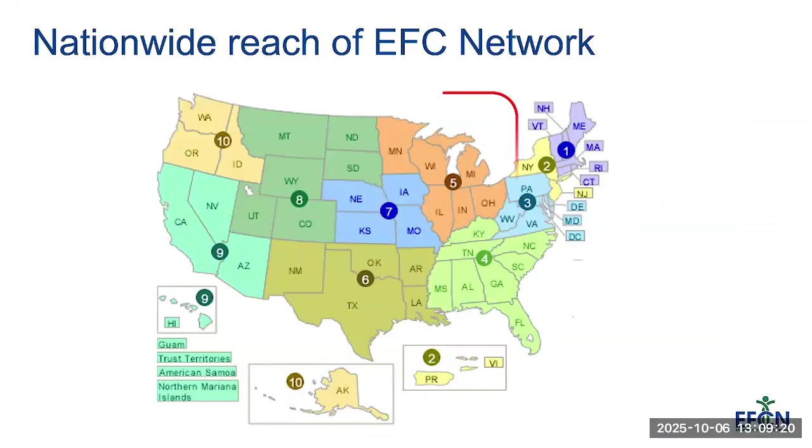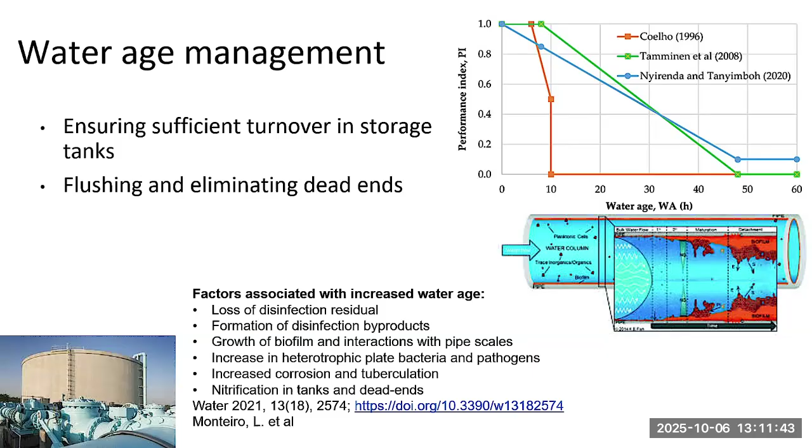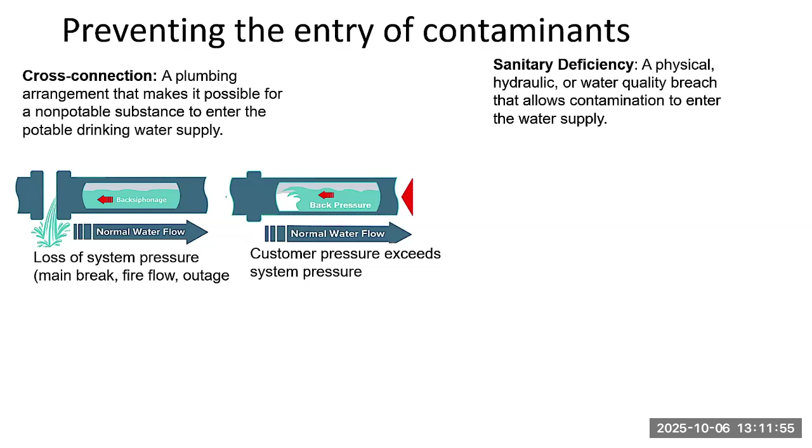Another way that contamination could enter is through sanitary deficiencies. And here we have an image of actually a well-protected air vent valve, and we have a screened inlet, so bugs and pests can't enter. And it's well vented, and it's 8 feet above the ground. So there's different things that could happen here, though. Still, let's say we had floodwaters that were 9 feet above the ground, and then that would be an entry point where floodwaters, contaminants could get into the system.

And a final aspect that Daryl's going to talk about tomorrow is sanitary deficiencies. And here's an example of a well casing that's not properly sealed on the top of the casing. So contaminants from flood or just dust or some kind of a spill could enter directly into the casing and down into the groundwater.

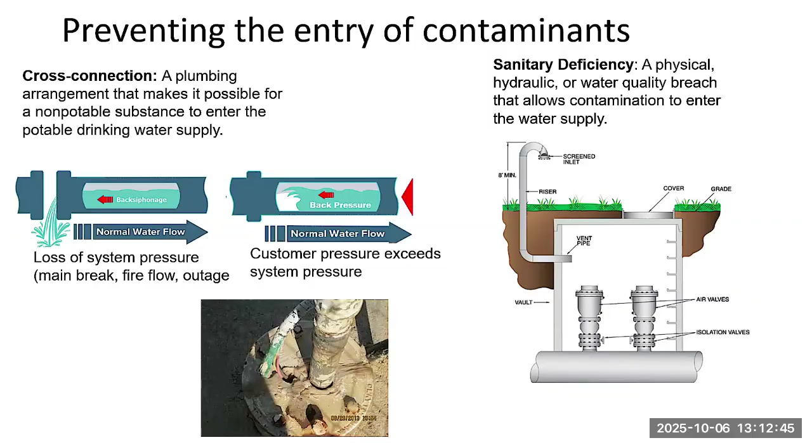There are some different things that can occur when we repair water main leaks and breaks. And in general, we want to have some procedures that help us to protect water quality. And the three basic things that we do when we go to repair a main break or a leak, or just any kind of repair to the water main, is we isolate that area by valving. We flush out the contaminants, and we disinfect that section of main after the repair.

And there's some different factors here. Table 1 at the top left of your screen is the types of things that could happen associated with the repair of water mains. One is we can have contamination by pathogens, bacteria and viruses and protozoa, and some different types of chemical issues. We could have some kind of a chemical that enters. We could have a loss of disinfection residual. We can have different types of problems with pH and turbidity.

And they did a study here that's reflected in table 2 that looked at break repair sites, and they sampled the water in the trenches, and they sampled the soil around the main break, and they found several instances where there was either total coliform bacteria or fecal coliform or different types of bacteria that are known to cause waterborne disease. And in several instances, they found bacteria that would cause illness in many of the samples.

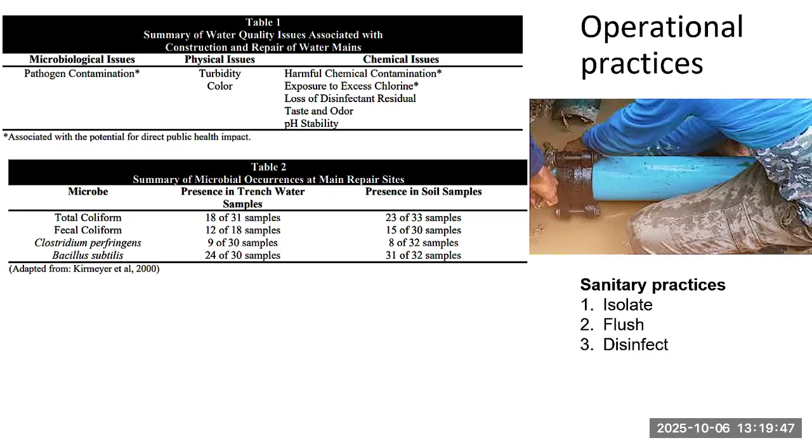And what we just did was kind of an overview, an introduction to the topic of distribution system water quality. And now we're going to start getting into our next topic, which is system flushing. There's lots of benefits to flushing. You can see some operators here that are making some repairs at a hydrant or preparing a hydrant to potentially add a swab or a pig in there. And you see an operator on the bottom of your screen that's actually flushing a hydrant.

But there's lots of benefits. One is it reduces the water age. It can reduce the biofilms and scales inside of pipes, and it removes the sediment that collects in water mains. And it can actually help to reduce disinfection byproduct formation, and it can bring in fresh chlorine residual to dead ends.

Normally, we flush at least once a year. I've heard a range. I've heard of some systems flushing twice a year, and I've heard of some systems flushing every 2 years. But in general, at least annually. And when I talk about an annual flushing, I'm talking about high velocity flushing of the whole system. But you might want to gently flush dead ends more often than that to prevent disinfection byproduct growth.

And also, when you're out there flushing, it gives you a chance to put your hands on the valves and the hydrants just to make sure they're working. And you could note if something needs some kind of repair, something that's malfunctioning. Even something as simple as painting the outside of the hydrant to prevent corrosion, or a valve that doesn't work, you would get a chance to see that. So there's a lot of benefits.

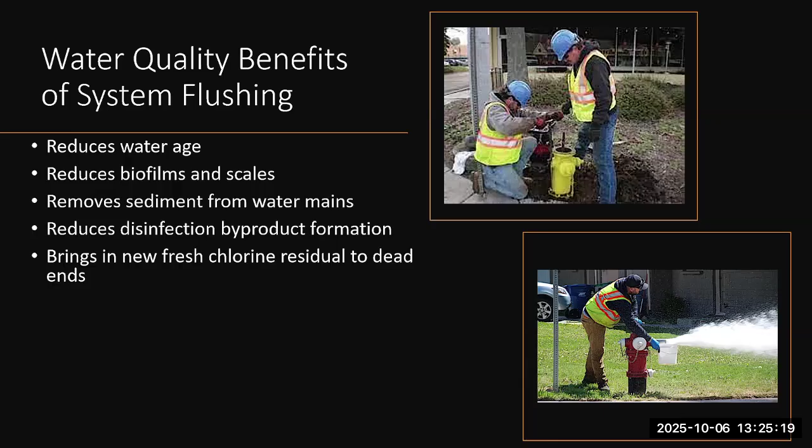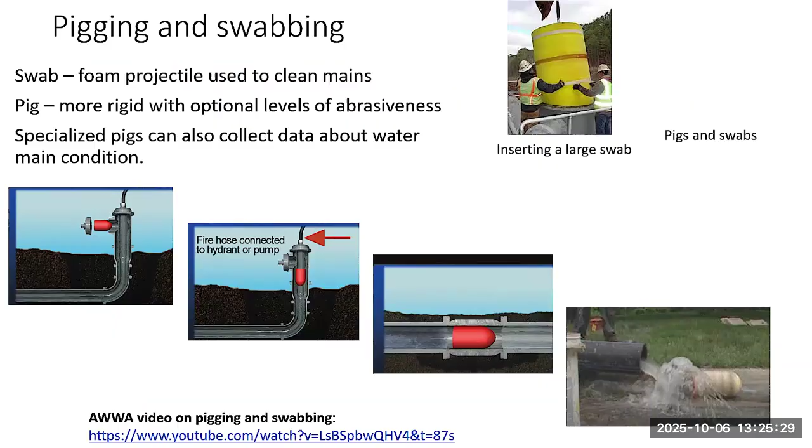And then normally they'll have the outlet hydrant go through a flow analysis unit so they can know when to stop, when the main has been cleaned, and they can see that the turbidity goes up quite a bit, and then it will drop off as the main is cleaned, and they can discharge that dirty water to the sewer.

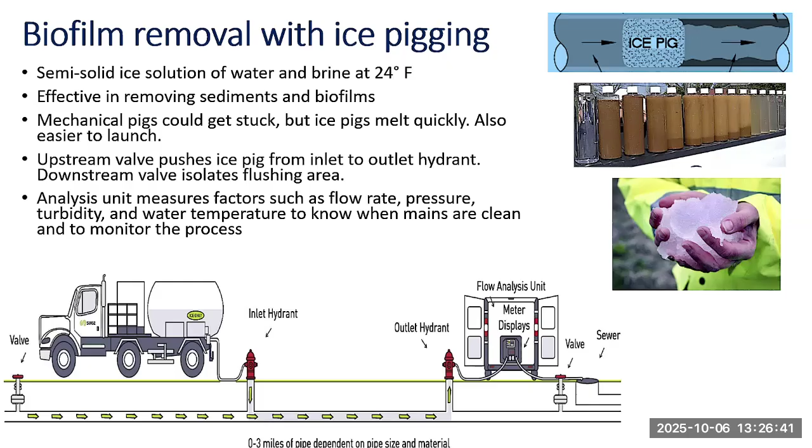In the analysis unit, they're also monitoring things like the pressure and water temperature, and looking at the turbidity of the water that's flowing through. Eventually, it will become clean. The turbidity will drop down to normal.

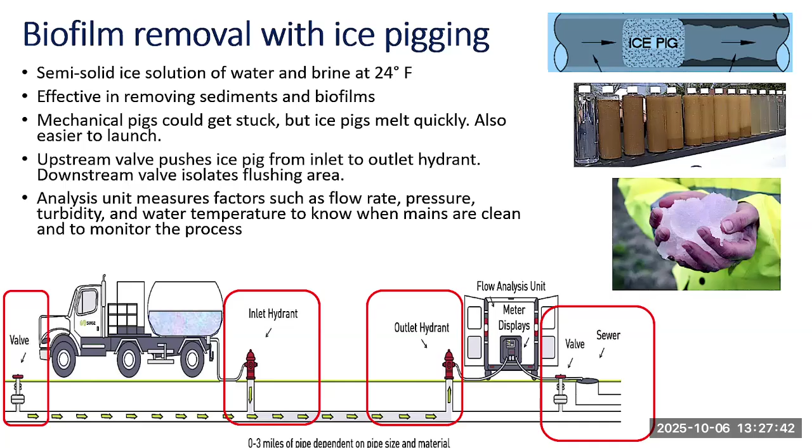So what you can end up doing is moving dirt and sediment around, but not out. And you can have insufficient velocity. We're trying to get the velocity up between 2.5 and 5 feet per second. But if it's going different directions and coming from multiple directions, we really can't have any certainty that we can attain the right velocity.

So what we use is unidirectional flushing, and what that means is we're closing some of the valves so that the water is forced to go down a certain path. And we continue to do that with each line so that we can attain the desired velocity. Let's say we're trying to attain 5 feet per second, and we use valving to do that.

And like I mentioned before, going out and flushing can be a form of preventative maintenance as well, because here we are, we're operating valves, we're operating hydrants, and you could even take some hydrant flow measurements while you're at it. So this can be a really beneficial practice to collect the data while you're cleaning the mains. And so when we do unidirectional flushing, it's kind of like sweeping the system. So we're using a systematic method.

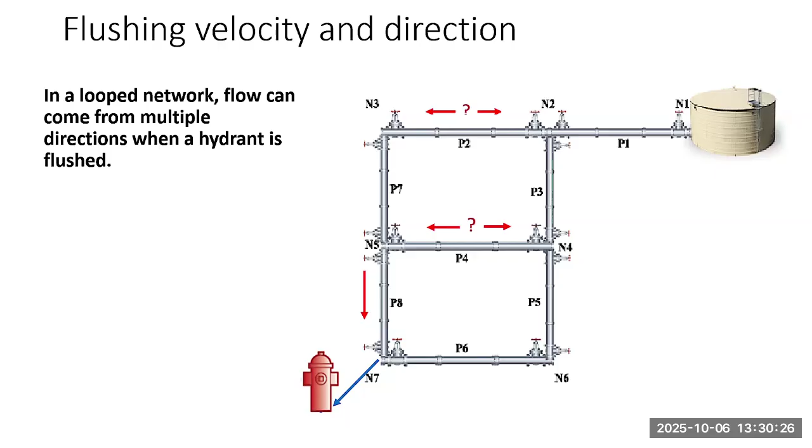When they extended flushing as high as 15 pipe volumes, they really didn't get much extra yield out of it. It did continue to increase removal, but it was kind of diminishing returns. So you're using extra water and not getting a lot back from it.

We've mentioned this a couple times, but there's some studies where you can see that main breaks and repairs are correlated with increasing waterborne illness. And some of these studies are from Europe, but there was one in Norway where they found that houses that were downstream of a main break or repair, could even be a planned repair, were 1.58 times more likely to contract some kind of gastrointestinal illness. That was pretty recent, 2007.

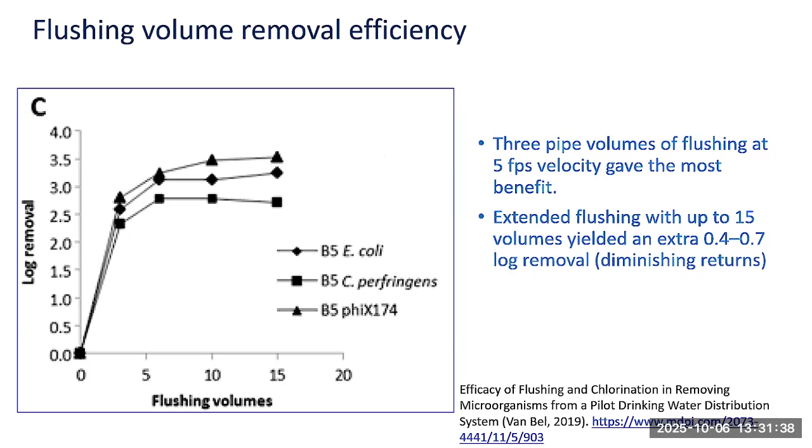And in Sweden, they found that people were 1.9 times more likely to report an acute gastrointestinal illness after a pipe break or repair in the distribution system. And that was a pretty recent study, 2017. There's some different things we have to think about. We talked about the contaminated water in the trench or the groundwater or the soil itself. Also, if you have a main break, it can draw in contaminants through cross connections.

But also another thing is that if you have sewage pipelines that are close to the same elevation or close to the area where there's a main break, that could also be a source of contamination that could enter the pipe when it's open for repair. And as we mentioned before a couple times, isolating, using sanitary repair procedures, including disinfecting tools and parts that we're going to add, and then flushing and disinfection following the repair. Those are all good ideas.

And so we have a second poll here. What is a recommended flushing protocol?

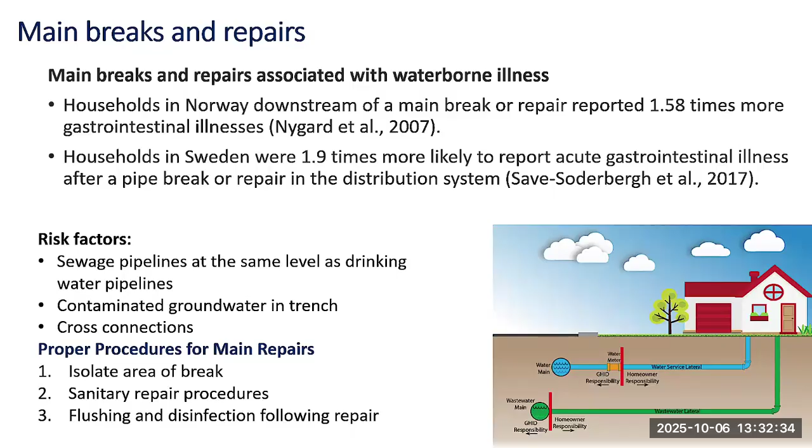You guys are really fast on your polls. I appreciate that.

Okay, so we have 86% have participated in the poll so far. Excellent. And I see that the majority of you have chosen unidirectional flushing at 5 feet per second for 3 pipe volumes, and that is indeed the recommended target for flushing a hydrant. Thank you for participating in that.

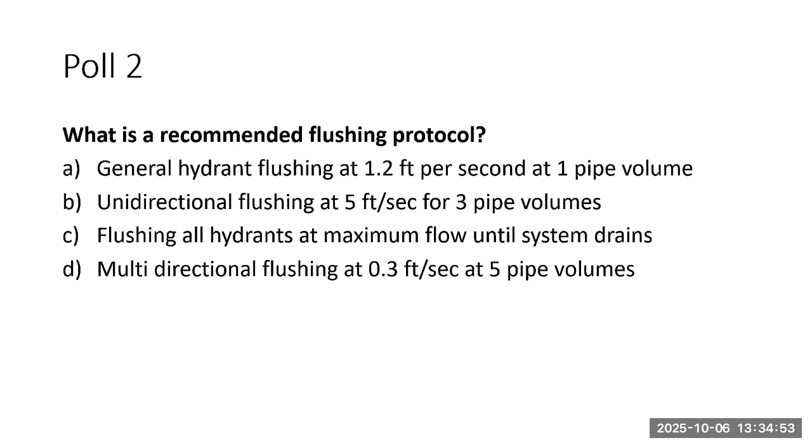And now we're going to talk about corrosion control a little bit. We talked about flushing. Let's talk about corrosion control. And first of all, look at the problems, what corrosion is, and some ways that we can prevent it. Corrosion, you can see a pretty poor, badly corroded pipe here. Looks like there's some real problems there. So one of the things is tuberculation, and that's when you have iron tubercles that grow in the pipe where iron is being deposited, and there's an interaction there with bacteria.

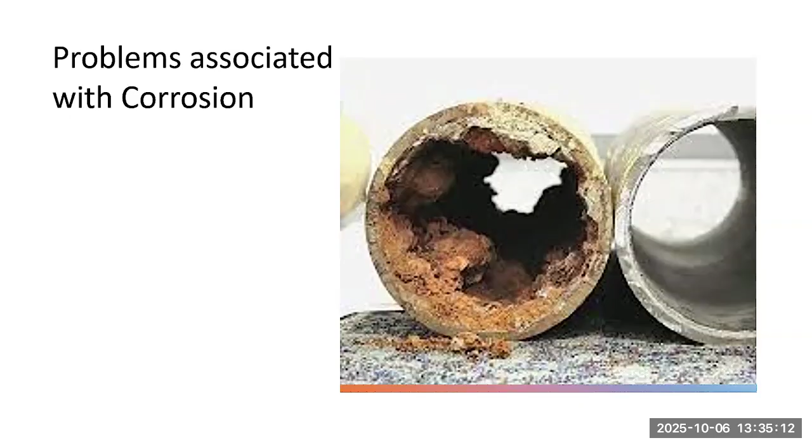Also, corrosion can be involved with the release of lead and copper. We have the lead and copper rule that looks at lead and copper in customer plumbing, and that is a result of corrosion. And corrosion can also lead to main breaks and leaks. So you have not only pathways for contamination to enter, but you're losing water. You're pumping and treating water, and then you lose it through cracks. And also, it can increase microbiological problems because you can see, looking at this pipe, there's lots of places for bacteria to be harbored in those tubercles in that pipe that we're looking at.

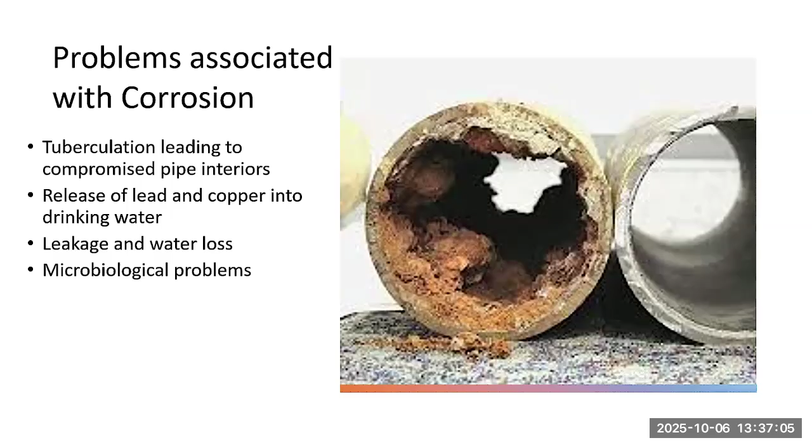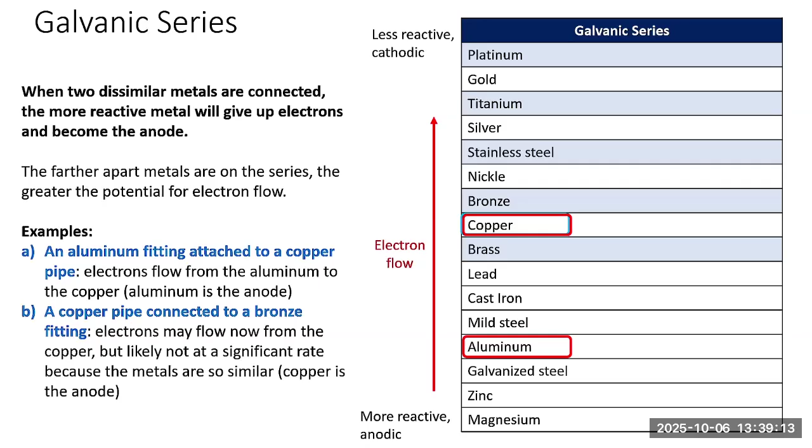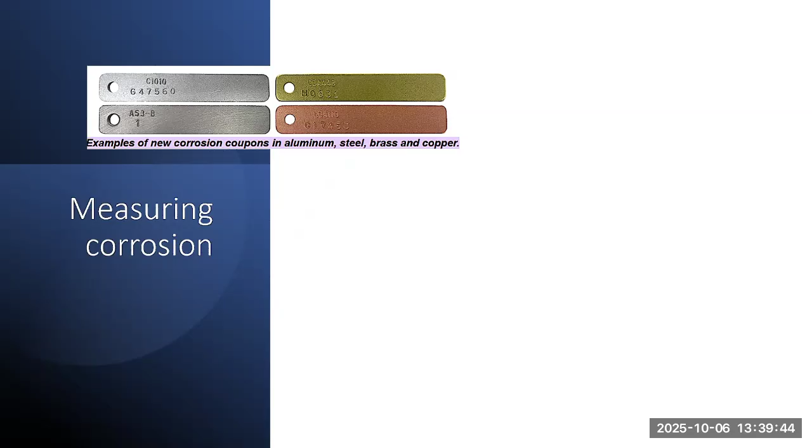To measure corrosion, we can use coupons. And here's different kinds of coupons here. We have aluminum, steel, brass, and copper. And the idea is that the coupon is the same material as the plumbing material or main material that we're trying to protect. And so we can actually have a coupon rack that contains the different types of coupons, and we can allow our drinking water flow to pass through those coupons and let the water flow for 90 to 100 days, then take them back out and weigh them and see if they've lost any weight. And so the coupon has to match the material that you're trying to protect. And so any difference in weight will give us a reading on how severe or how much corrosion has been occurring.

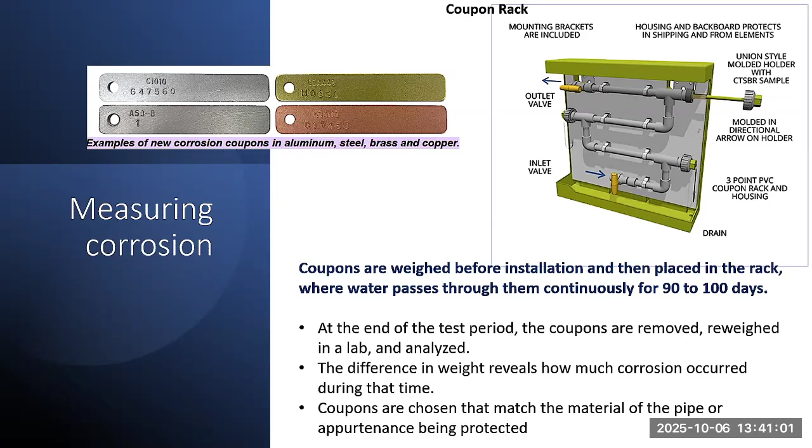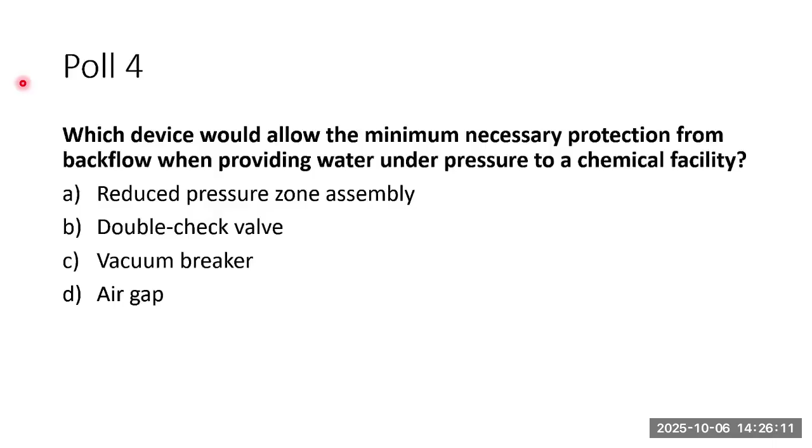So looking at the poll, which device would allow the minimum necessary protection from backflow when providing water under pressure to a chemical facility? 41% said A, reduced pressure zone assembly. 25% double check valve, 16% vacuum breaker, and 17% air gap. So let's see what we come up with.

The answer is A, reduced pressure zone assembly, an RPZ. And that's most likely based off the concern level of a chemical facility. So we would want to protect that from the rest of our system.

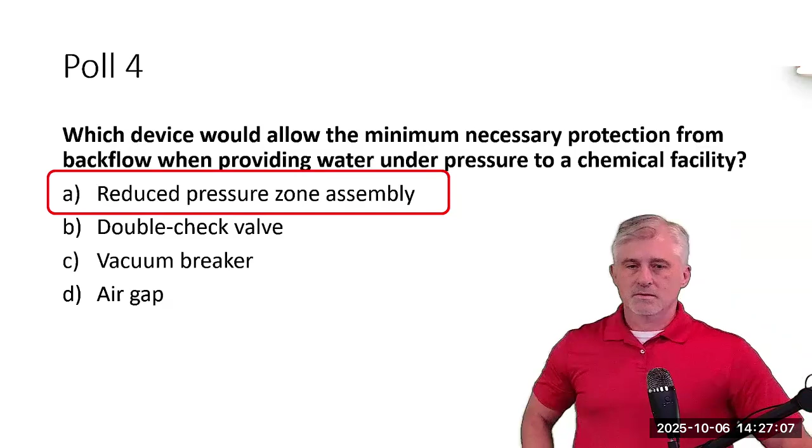So good job, people. All right, so I'm here to talk to you about some basic distribution math concepts. We're going to cover a few different things. We'll talk about volume. We'll talk about pressures, the important concept of flow in our distribution system, concentration when it comes to things like parts per million or milligrams per liter, and how we would go about dosing some chemicals using the formulas.

One thing that's important to consider with this is, how many gallons make up a cubic foot? This is kind of surprising to me. I think of a gallon and I think of a cubic foot, and it doesn't seem like there'd be almost 7.5 gallons in there, but that's what it is. A cubic foot is equal to 7.48 gallons. So if we had a tank that was 24 cubic feet, how many gallons would that tank hold?

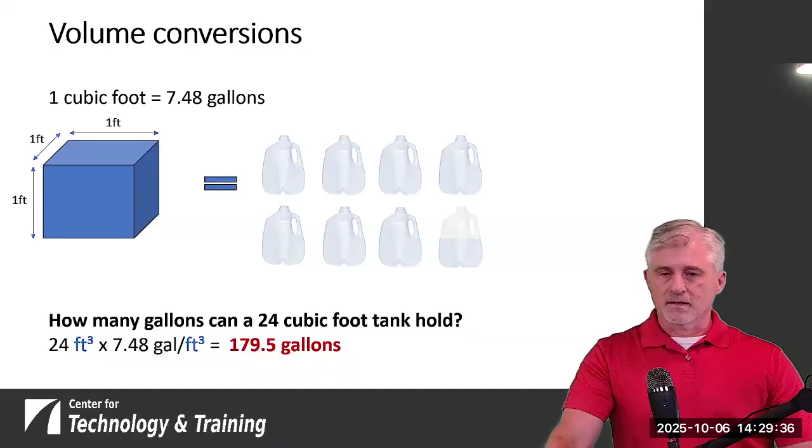So if we take our 24 cubic feet, we multiply that by 7.48 gallons per cubic foot, and we get 179.5 gallons. I think Greg mentioned something about having calculators available. There will be a few poll questions, and they do involve math. So if you want to write anything down, this factor for the number of gallons per cubic foot is an important thing to jot down so you have it available for when you go to do the polls. That and our volume calculations are all important things.

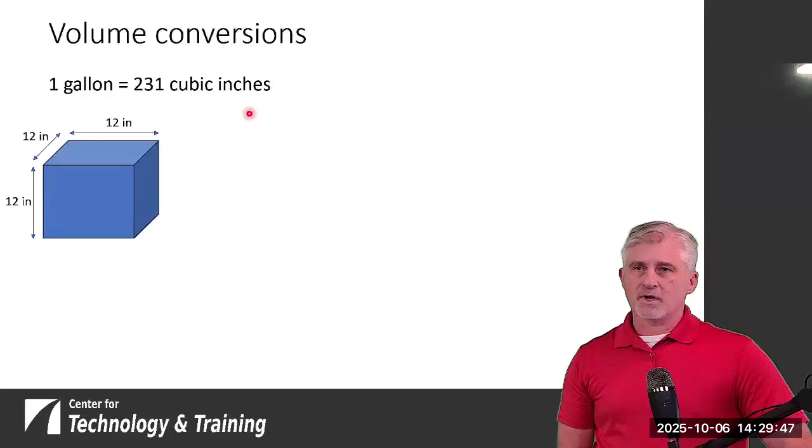So if we know that a gallon is equal to 231 cubic inches, how many cubic inches are in a cubic foot? We're going to convert from cubic inches into cubic feet. The way we do that is we multiply our inches out just to see how many are in a cubic foot. We've got 12 inches times 12 times 12. It gives us 1,728 cubic inches in a cubic foot.

All right. So then how many gallons are in that 1,728 cubic inches? You do that conversion by taking the number of cubic inches in a cubic foot and dividing that by the number of cubic inches in a gallon. The inches will cancel, and that gives us 7.48 gallons in a cubic foot. So we kind of worked this problem backwards, and it's important to be able to do this with the math that we have to do with water. It's good to be able to go in different directions.

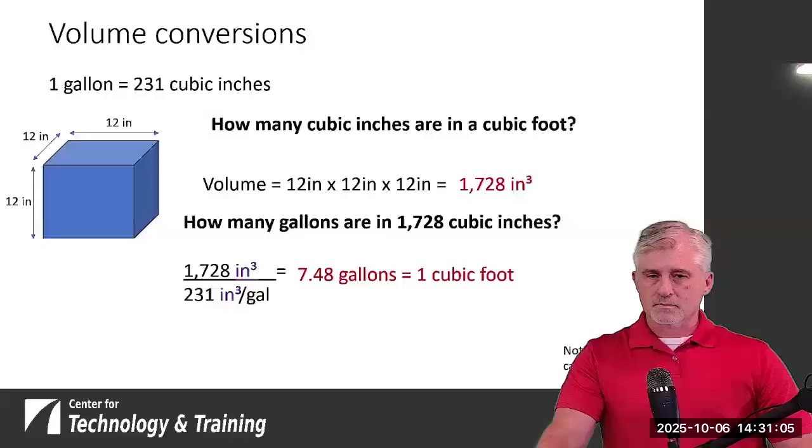All right. We're going to start talking about volumes of cylindrical pipes and tanks, things like that. So it's important to understand the relationship between the 0.785 and pi. We all know pi is an irrational number. It goes on and on, but typically when we go to use it, for most cases, we can use 3.14. Pi is equal to the circumference around a circle divided by the diameter of the circle.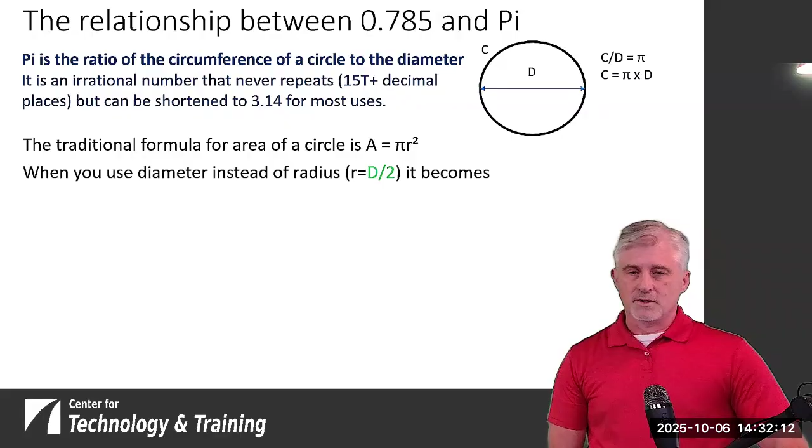Traditionally, I was taught that the area of a circle is equal to pi r squared. There's been a movement to use a slightly different formula. If instead of the radius we put in the diameter divided by 2, which is what the radius is equal to, we get the area is equal to 3.14 times half the diameter times half the diameter. If we manipulate our equation, we end up with 3.14 divided by 4, which is the two halves, multiplied by diameter squared, and that gives us 0.785 times the diameter squared.

So areas, you can use either one of these. You can use area equals pi r squared if that's what you prefer, or you can use area is equal to 0.785 times diameter squared. And I think for most of the cases in this, you'll see that we use the 0.785.

And what this tells us is that for a circle with a certain diameter and a square with the same sides, the area of the circle is 78.5% of the area of the square. If the diameter is the same as the length of the square side, 78.5% of that area is the circle.

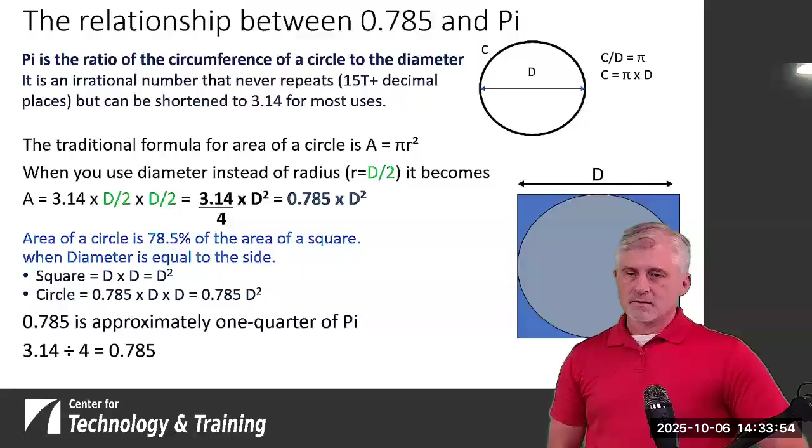Square equals d squared, circle is 0.785 d squared. And that works out to roughly a quarter less.

So cylindrical volume. We did volume of a rectangular prism, and now we're going to look at cylindrical volume. It's simply the area, 0.785 times the diameter squared, and then we multiply that by the height. So we determine the area at the end and multiply by the height, and that'll give us the volume. And if you like to use pi r squared, you can just multiply that by the height, and that'll also give you the volume.

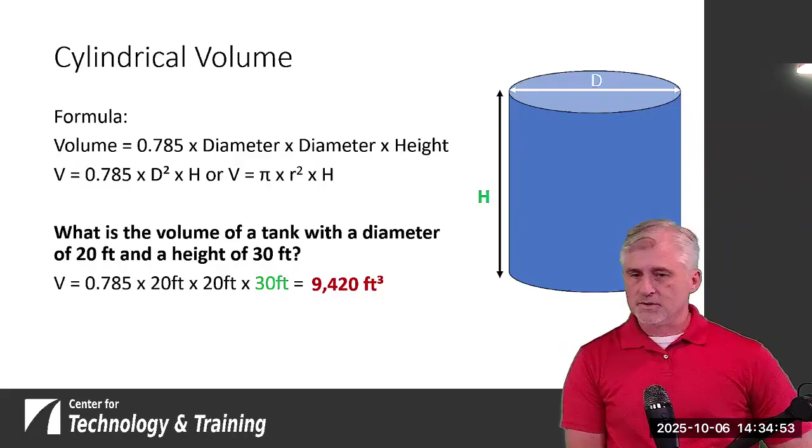So let's look at a little problem here. What is the volume of a tank with a diameter of 20 feet and a height of 30 feet? So we put that into our equation. And if you're doing it at home on your calculators or at work, it's 9,420 cubic feet.

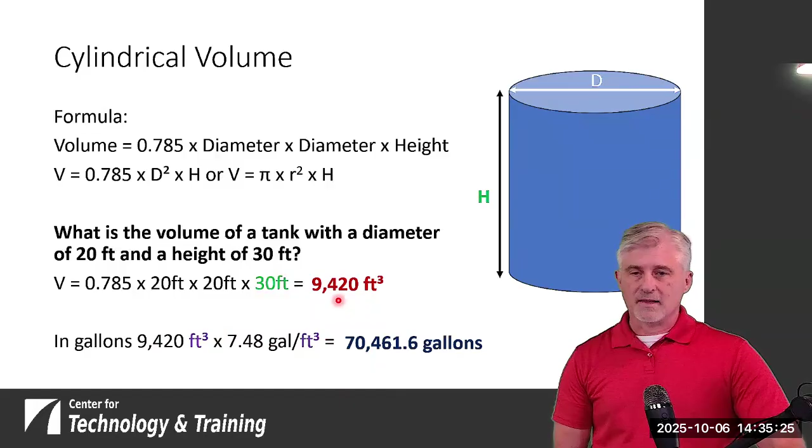So if we want to determine how many gallons there are, and we know how many cubic feet there are, we can multiply our cubic feet by 7.48 gallons per cubic foot. The cubic feet cancel out, and it gives us a number in gallons. So that works out to 70,461.6 gallons. That's equivalent to 9,420 cubic feet.

Okay, so we've got our first poll here. A cylindrical storage tank with a diameter of 24 feet is filled to a height of 20 feet. How many gallons are in the tank? Lori, could you set us up? We'll just give 3 minutes for this one. Timer set. Thank you.

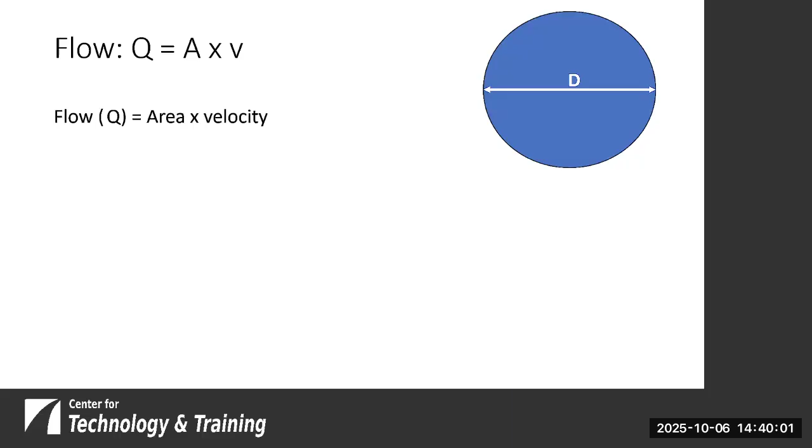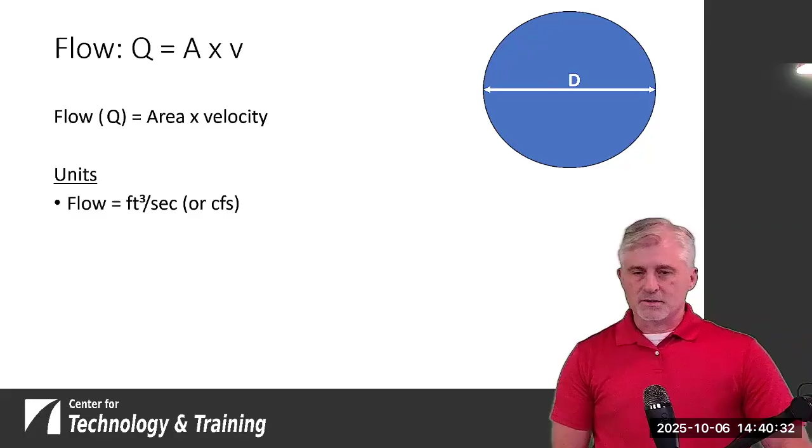Great. So let's talk about flow. That's our next concept. Flow is important for distribution systems. Obviously, we want that water to flow through our system, and flow is equal to the area of our pipe times the velocity the water's going through. Units for flow are typically cubic feet per second, or CFS. The area of the pipe is most often in square feet, and our velocity is often in feet per second. We'll see later that these things can change, but to start this discussion, we'll use those units.

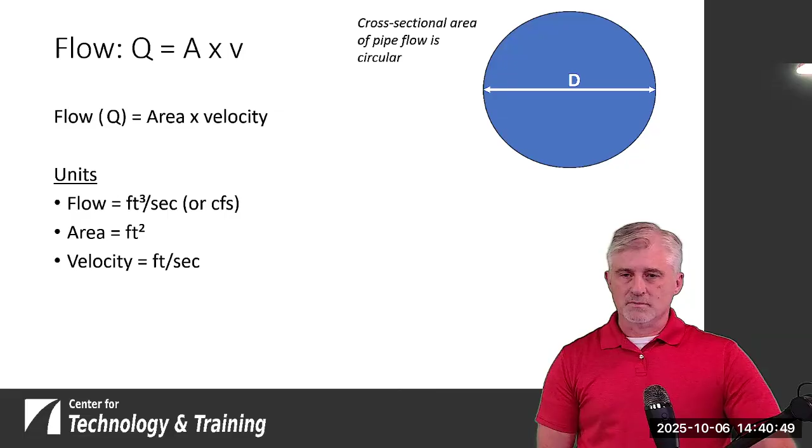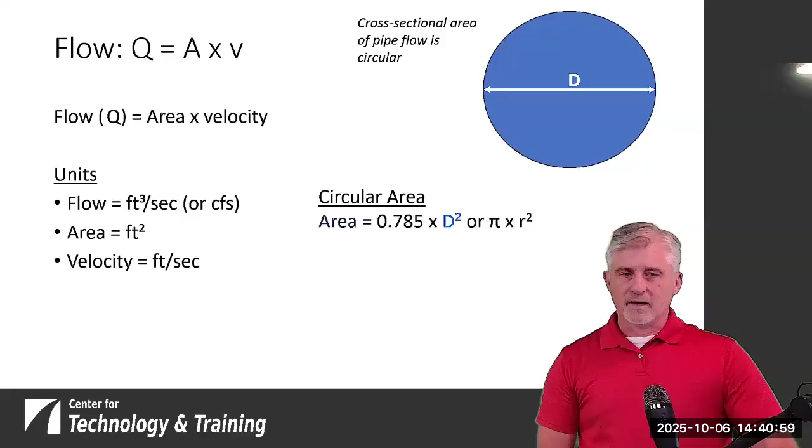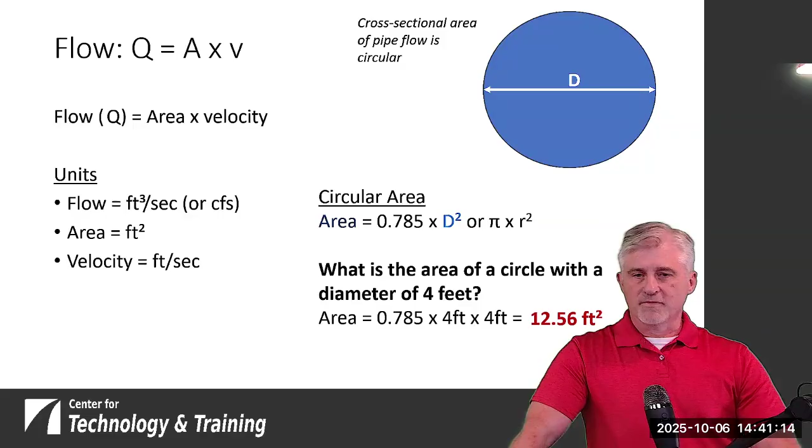All right, the area of the circle, as we said before, is 0.785 d squared, or pi r squared. What is the area of a circle with a diameter of 4 feet? We've done problems like this already. The area of a circle with a diameter of 4 feet is 12.56 square feet.

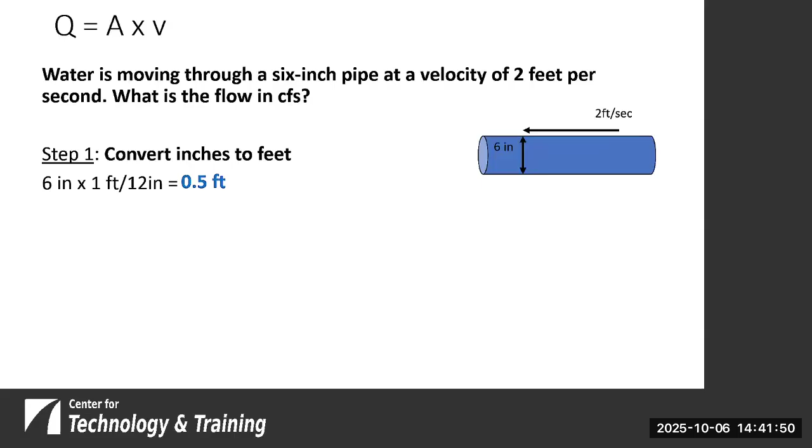So let's throw some velocity into this equation. Water is moving through a 6-inch pipe at a velocity of 2 feet per second. What is the flow in CFS? The first thing you would do is convert from inches to feet, so we have consistent units, since CFS uses feet. 6 inches divided by 12 inches gives us 0.5 feet, so half a foot. I think most people probably knew that was the answer. Next, we would calculate the area.

We put that 0.5 feet into our area formula, and that gives us 0.19625 square feet. So now we've got our area, and we know that flow is equal to area times velocity. They gave us the velocity at 2 feet per second, so we have everything that we need. We just need to put that into our flow formula.

So if we put those numbers in, once again, we have feet squared times feet. So that's going to give us cubic feet per second, or it works out to 0.3925 cubic feet per second, or CFS. So if you've got a 6-inch pipe with a velocity of 2 feet per second, our flow is about 0.4 of a cubic foot per second.

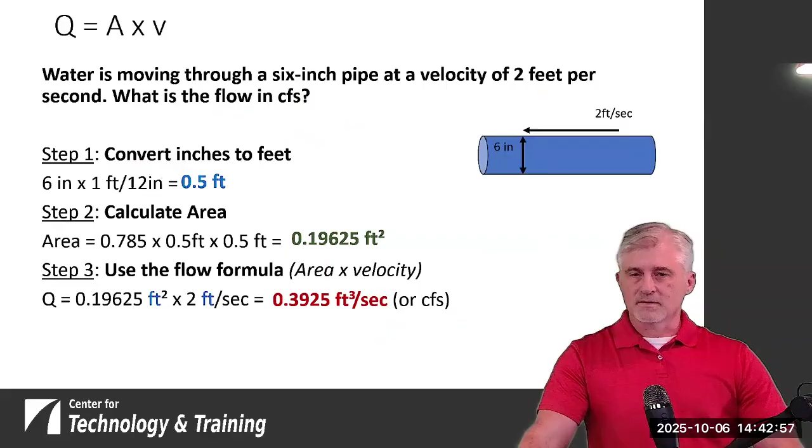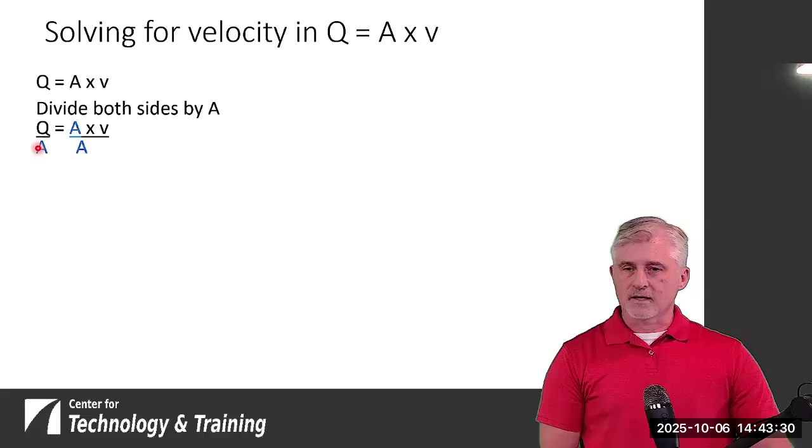So now we're going to look at it a little different. Sometimes you go to figure this stuff out, and maybe you know the flow and you know the area, but you need to solve for what is the velocity. So if we take our initial formula where flow equals area times velocity, we divide both sides of the equation by the area. What that does is that removes the area from the velocity side of the equation and puts it on the flow side.

And so that area cancels out on the right side of our equation. And in essence, it gives us our velocity is equal to our flow divided by our area. So now if they give us flow and they give us area, we can determine what our velocity is.

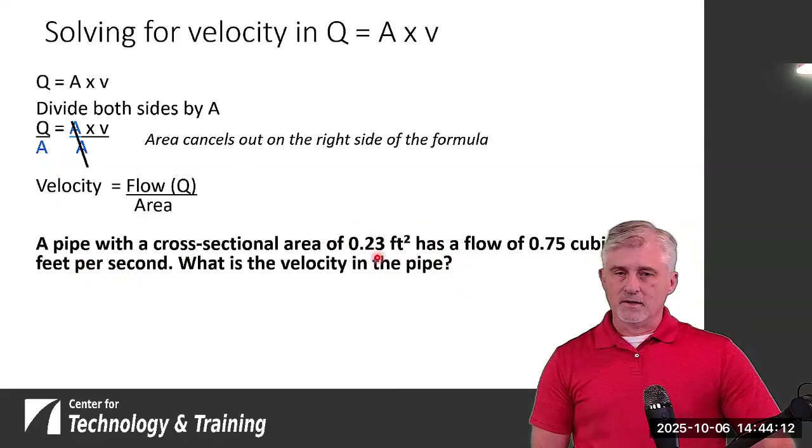So a pipe with a cross-sectional area of 0.23 square feet, so they're already giving us the area, they didn't make us calculate that, has a flow of 0.75 cubic feet per second. What is the velocity in the pipe? So we know our area here, and we've got our flow here. So we just put those into our equation.

And so velocity is equal to 0.75 cubic feet per second divided by 0.23 square feet. In this case, we're going to cancel all but the one unit of feet on the top, and we'll have something in feet per second. It's 3.26 feet per second.

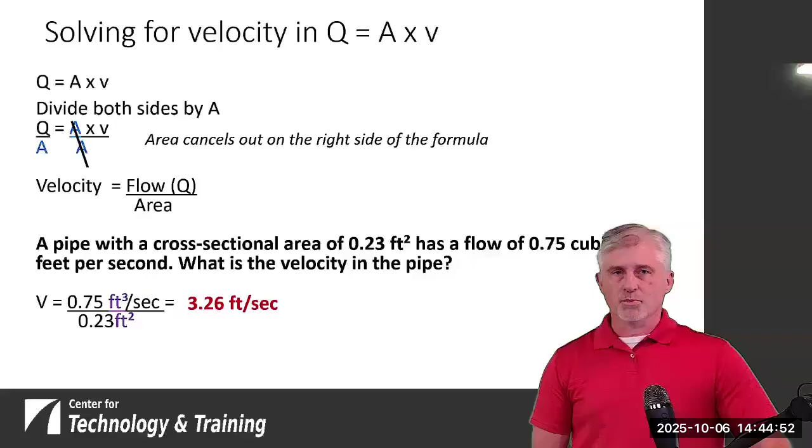So as I said, we'll have some polls on these formulas, the flow formula, the velocity flow formula. Those are probably important things to maybe jot down that might help you get through the poll questions. So flow rate can also be denoted in gallons per minute.

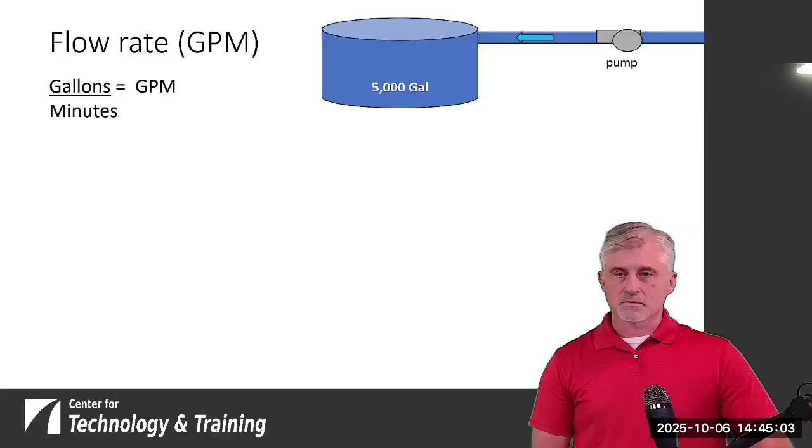So we'll look at a little scenario here where we've got a pump filling a 5,000 gallon tank, and it takes 12 minutes to fill that. So they've given us the volume of the tank and they've given us time. So what is the output in GPM? We know that it's 5,000 gallons and it takes 12 minutes to fill it. So we can simply divide the gallons by the minutes and it gives us gallons per minute, or GPM. So that's 416.7 gallons per minute.

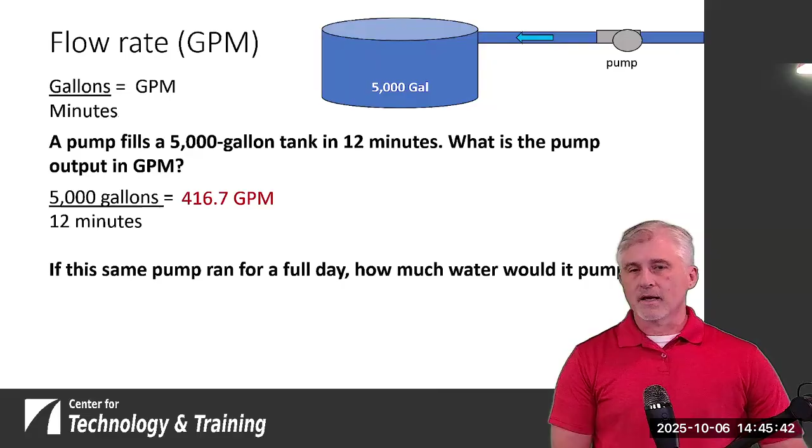So now you get that same pump, and we know that it pumps 416.7 gallons per minute. How much would it pump in an entire day? So when I work one of these problems, I like to take it step by step so that I know that I'm going from gallons per minute to day. The first thing I know to get rid of minutes is that there's 60 minutes in an hour. And if I want to get rid of my hours and get to days, I know there's 24 hours in a day. So that's how I write them out.

The minutes cancel because we've got a minute on the bottom and a minute on the top. The hours cancel for the same reason. So it's simply taking our 416.7 gallons multiplied by 60 by 24. We'll be left in gallons per day. We multiply those all out and we get 600,048 gallons per day. So a 416.7 gallon per minute pump is going to pump over 600,000 gallons in a day.

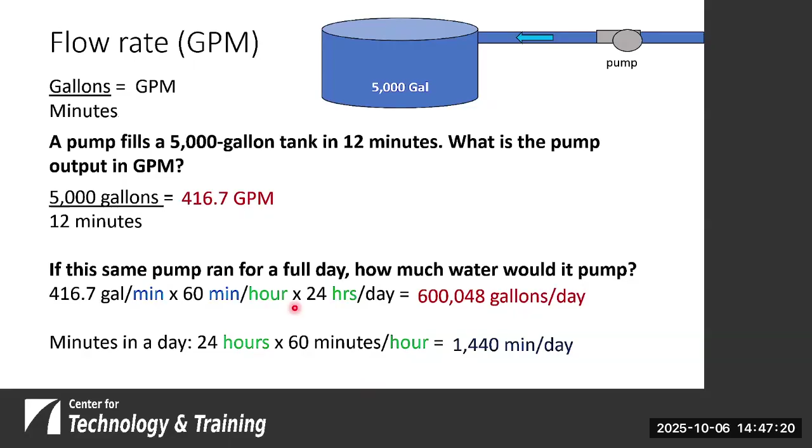So this is just a handy little thing. If you like just doing the conversion rate from minutes to days or minutes to hours, you can do this minutes to day conversion by just taking: there's 24 hours in a day, there's 60 minutes in an hour. Your hours are going to cancel out, and that's going to give you 1,440 minutes per day. So if you're good at memorizing stuff, you can do that, or if you're not so good, you can do it like I do.

So you will have need at times to determine from gallons per minute how many million gallons a day there is. So we've got our gallons per minute, we multiply by 1440 minutes per day, and we divide that by a million gallons, and this is per a million gallons. So this is basically like dividing it by 1.

We can take a pump that produces 400 gallons per minute. That goes in, that replaces this. And we know that there's 1,440 minutes in a day. Our gallons will cancel, minutes will cancel, and we'll end up with 0.576 million gallons per day. So that's how we would go about converting from gallons per minute to million gallons a day.

Flow rate conversions. So we can convert between cubic feet per second and gallons per minute. So if we've got our cubic feet per second, we multiply that by 60 seconds per minute, and then we multiply that by our 7.48 gallons per cubic foot. That's how we can convert from cubic feet per second to gallons per minute.

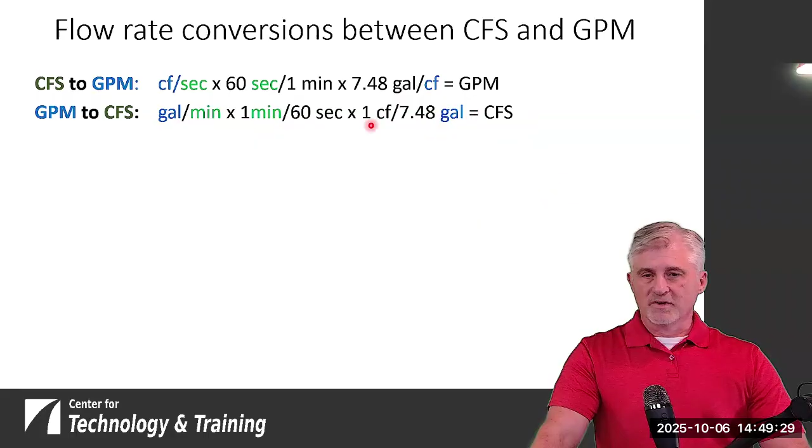All right, so we have a pipe that has a flow of 0.5 cubic feet per second. What is the flow in gallons per minute? We want to go from cubic feet per second to gallons per minute, so we're going to use this top formula. For cubic feet per second we put in our 0.5, multiply by 60 seconds per minute, multiply by 7.48 gallons per cubic foot. Cubic feet cancel, seconds cancel, and all we're left with is gallons per minute. We multiply those out, and we should get 224.4 gallons per minute.

Moving on, we're going to look at a pipe that has a flow of 500 gallons per minute, and we want to know what that flow is in cubic feet per second. I want to get from gallons per minute to cubic feet per second, so I'm going to use this conversion. Put in our numbers. We had 500 gallons per minute. There's 60 seconds in 1 minute. And we utilize the 7.48 gallons per cubic foot.

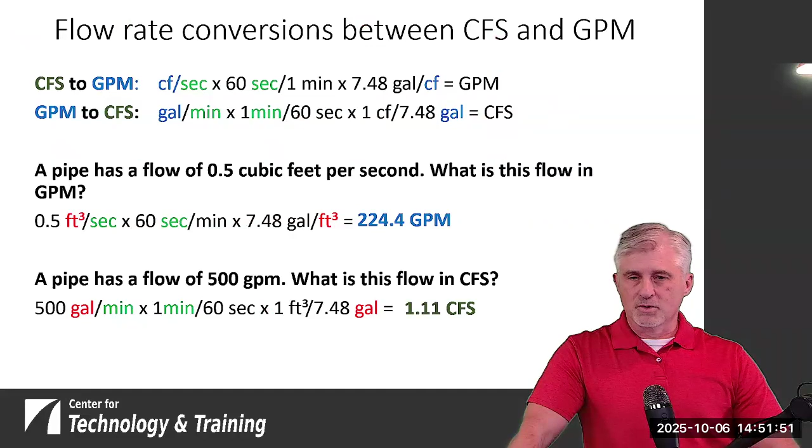We can just flip these over. They're equal to each other, so whether they're on the top or the bottom doesn't matter. We need to get rid of the gallons, which was on the top of the formula to start with, and we need it in cubic feet per second. Hope that makes sense. So gallons cancel, minutes cancel, and we're left with about 1.1 cubic feet per second. These are important things you may want to jot down. They could be helpful when we come to our poll question.

All right, so now we're going to look at flow velocity with a conversion. We're going to take this another step and start to put all these things together. We talked initially about volumes and areas, and we're going to use all these things together. So we've got a pipe that has a diameter of 18 inches. It's got a flow of 800 gallons per minute. Now we want to know what the velocity is.

The first thing that I would do is convert from inches to feet, so that we can get our consistent units. And then we utilize our area formula. It's either pi r squared or 0.785 times d squared, or times d times d. And that gives us 1.766 square feet.

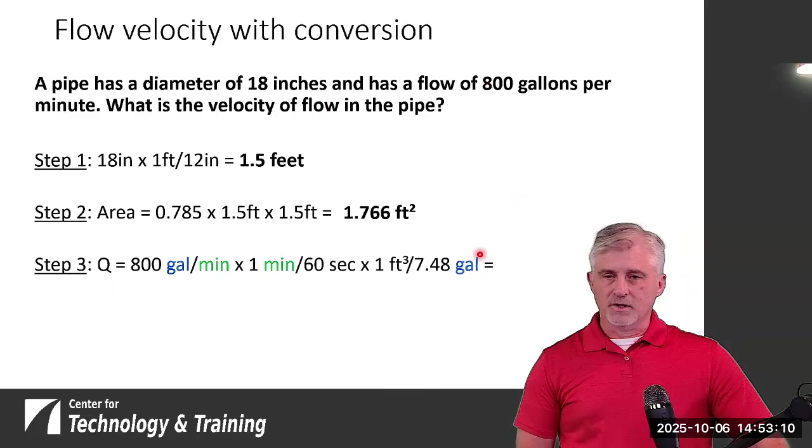So we go back to our flow equation, and the flow is equal to the gallons per minute that they gave us, 800 gallons per minute. We convert that from minutes to seconds by multiplying by 1 minute per 60 seconds. Our minutes will cancel. Then we multiply that by 1 cubic foot per 7.48 gallons, so we get the gallons on the bottom of the equation. That'll cancel the gallons from the top. Multiply that all out, we get 1.783 cubic feet per second.

So that pipe that has a diameter of 18 inches and a flow of 800 gallons per minute, the flow in that pipe is 1.783.

So now we know that the flow of that is 1.783. So now if we go back to our velocity equation, which is the flow divided by the area, we put those numbers in. The flow is here, 1.783 cubic feet per second. The area is 1.766 square feet.

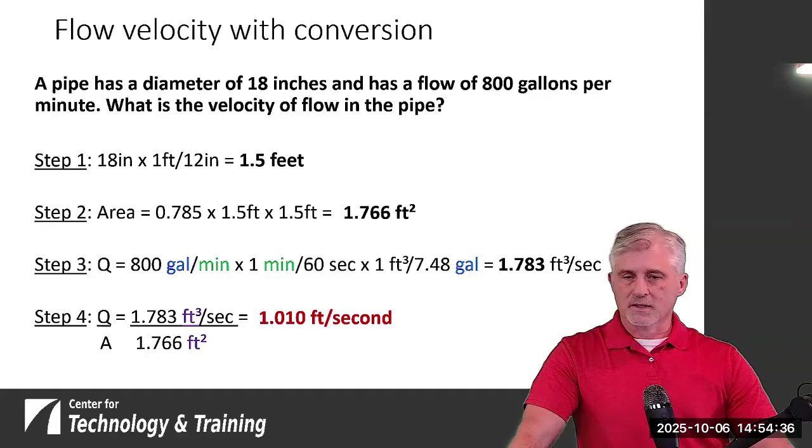With the units, we'll end up with feet per second. Well, when we cancel those out, it works out to 1.01 feet per second. So that's the velocity in that pipe.

So we got poll question number 6. What flow in gallons per minute is needed to flush a 500-foot section of 6-inch water main at a velocity of 5 feet per second? So we'll have to put some of these concepts together.

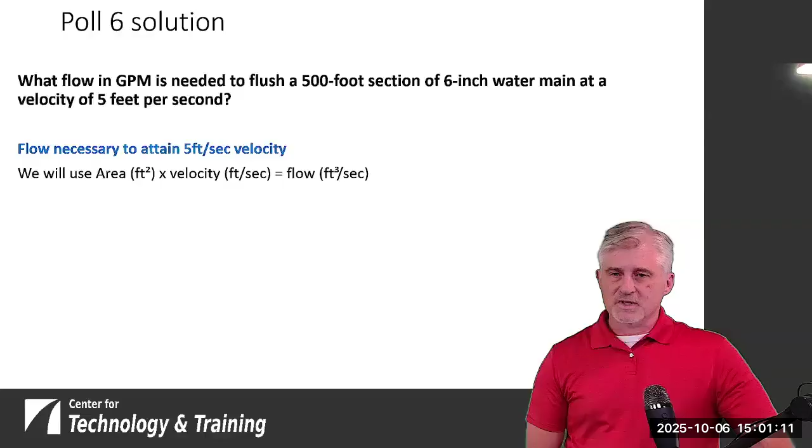Okay, so let's see. We'll go through and we will see how to work this problem, see what the answer is. So what flow is needed to attain a velocity of 5 feet per second? You first use the area times velocity is equal to flow. So the pipe area is 0.785 times the diameter times the diameter. That equals 0.19625 square feet.

So if we take the area times the velocity, we know that we need a velocity of 5 feet per second, and we have an area of 0.19625 square feet. So we multiply those two together, and that gives us a flow of 0.98125 cubic feet per second. Now we need to convert that from cubic feet per second to gallons per minute.

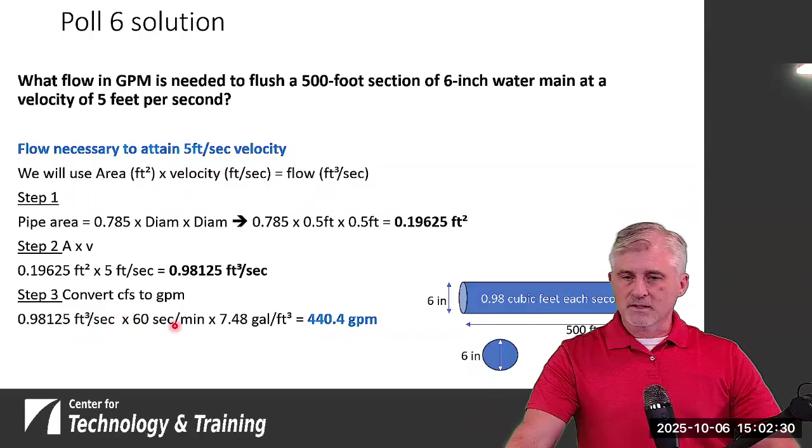So if we do that, to get it in minutes, we multiply that by 60 seconds per minute. And then to get it in gallons, we multiply by 7.48 gallons per cubic foot. That cancels out our cubic feet. We've got our seconds canceled out. So if we multiply the numbers together, we should have 440.4, and our units are going to be in gallons per minute, because those are the units that are left over when we do our canceling.

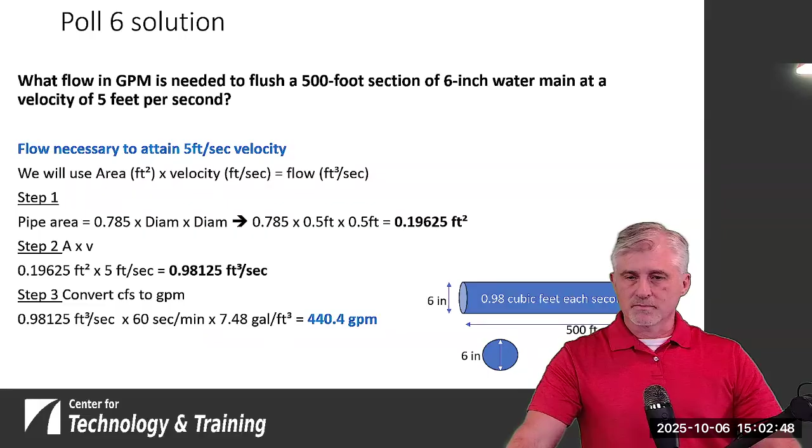All right, so our next topic of discussion is pressure. So pressure is the force that water exerts over a unit area. Okay, and we can express our pressure in either pounds per square inch or pounds per square foot. We also will express it in feet of water. So we know that water weighs 8.34 pounds per gallon. All right, and we had talked about there's 7.48 gallons in a cubic foot.

So if we put those together, we multiply them together, and our gallons will cancel out because we've got gallons on the bottom of this and we've got gallons on the top, and that's going to give us a number that's in pounds per cubic foot. And we multiply 8.34 by 7.48, we get 62.4 pounds per cubic foot. So that's how much water weighs in cubic feet. We already knew what it weighed in gallons, right?

So an example of a PSI conversion, if we have a square foot, that's equal to 12 inches times 12 inches, or 144 square inches. And we want to convert this 62.4 pounds per cubic foot because we want to know what it is in PSI. We take our 62.4 pounds per square foot. We multiply that by one square foot divided by our 144 square inches. And that gives us 0.433 PSI.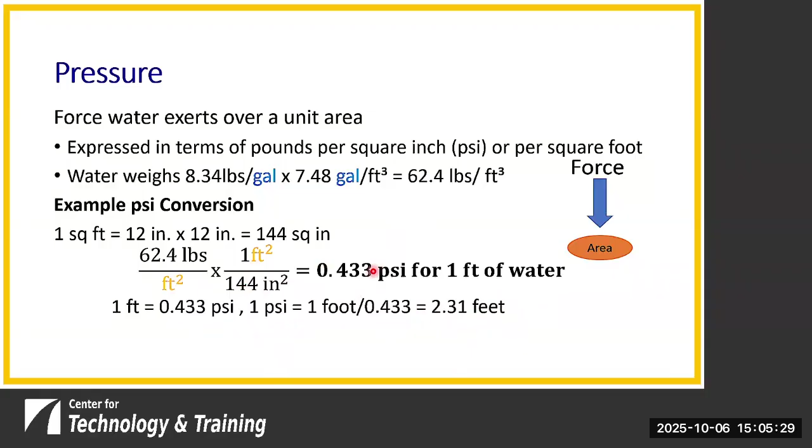And typically, if you memorize one of these, either 1 foot is equal to 0.433 PSI, or that a PSI is equal to 2.31 feet, you're probably fine. Because you can manipulate the numbers as we've done to get the other one. If you can get one, you can get the other.

Okay, so let's look at an example problem that shows our pressure. In our example, we've got a 10-foot wide by 20-foot long by 6-foot deep tank. That tank we know is going to hold 8,967 gallons of water when it's full to that 6-foot level.

We also know that the water weighs 74,850 pounds. We can figure that out by taking the number of gallons and multiplying it by the weight of water in pounds per gallon, which is 8.34. So that's how we get our 74,850 pounds. And we know that it acts on the 10-foot by 20-foot bottom area of the tank. So what is the pressure in PSI on the bottom of the tank?

The first step is we calculate the pressure in pounds per square foot. How do we do that? We take our 6 foot depth and multiply that by the weight of water, which we talked about earlier as 62.4 pounds per cubic foot. That tells us the pressure is 375 pounds for every square foot on the bottom of that tank.

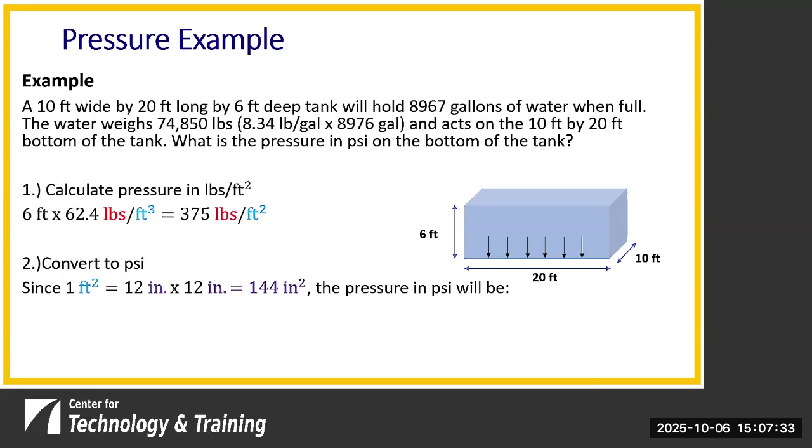Now, we want the answer ultimately in PSI, so we need to do a conversion. If 1 square foot is 12 inches times 12 inches, or 144 square inches, we take our 375 pounds per square foot and multiply it by 1 square foot per 144 square inches. That allows us to cancel out our square feet, and gives us pounds per square inch. We divide 375 by 144, and that gives us 2.6 PSI.

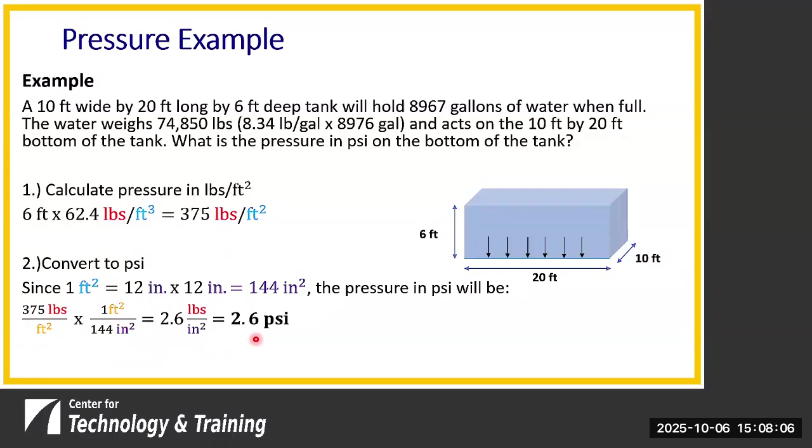One concept that is beneficial to some people is the idea that pressure is cubes of water stacked on top of each other. For each square foot, each one of those cubes weighs 62.4 pounds and exerts that pressure on that 1 square foot area. So if we have 6 feet, 6 of these cubes, each exerting 62.4 pounds, that's the equivalent of 375 pounds per square foot on the bottom.

And once again, we've shown our conversion where a square foot is equal to 12 inches times 12 inches, or 144 square inches. We can convert that 375 pounds per square foot into PSI: 375 pounds per square foot times 1 square foot for every 144 square inches. That equals 2.6 PSI for that 6 feet of water.

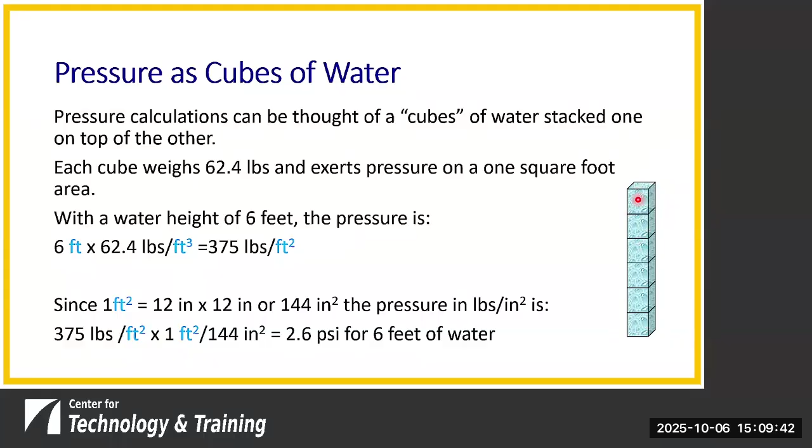Another important thing I had mentioned early on was concentration, which can be looked at in a few different ways. We look at it in parts per million, which basically says if we had 1 drop of something in 1 million drops, that's 1 part per million parts. Quite often when we talk about substances in water, we're talking about very minute concentrations. That's the idea behind a part per million.

Now, a part per million is equal in water terms to a milligram per liter. They're the same thing, because milligrams per liter looks at the weight of the solids in milligrams in a liter sample of water, and a liter of water weighs basically 1 million milligrams. So that weight in milligrams over the liter is the same as parts per million. There's a lot of confusion about parts per million and milligrams per liter, but they're in essence the same thing.

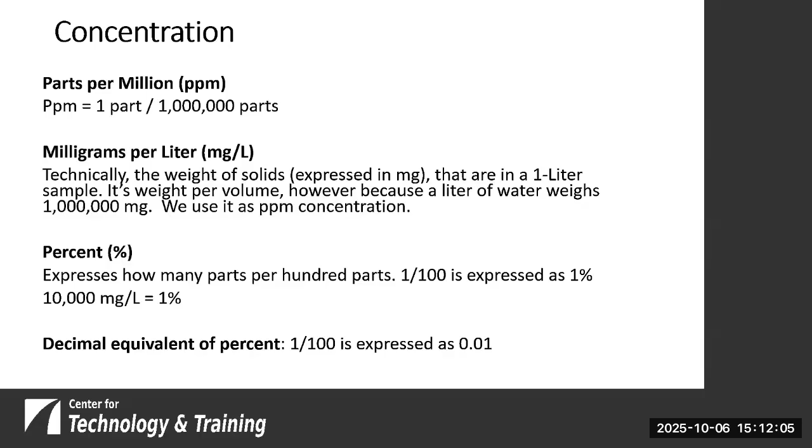And simply, percent is expressing something in parts per 100. 1% in milligrams per liter is equal to 10,000 milligrams per liter. To check that, divide 10,000 by a million, and you should get 0.01, which is equivalent to 1%. As shown here, the decimal equivalent of percent is 1 over 100, expressed as 0.01.

That's kind of concentration in a nutshell.

All right, so one of the more important concepts in working through math with water is the pounds formula. So the pounds formula is, we're going to take flow in million gallons a day, and we're going to multiply that by the concentration, quite often of chemicals, and multiply that then by the weight of water, or 8.34 pounds. And that'll tell us what the feed rate is in pounds per day.

So to look at a problem with this, if we've got a well and it produces a flow of 600 gallons per minute, so that's our flow, and the chlorine dose is 1.5 milligrams per liter. Milligrams per liter is equal to parts per million, right? And that goes there. What is the feed rate for gas chlorine in pounds per day?

Okay, so we're going to take our 600 gallons per minute, and we need to convert that into million gallons a day. So we do that, and we know that there's 1440 minutes per day. We could also write it out. We could go from minutes to hours to days if we wanted, but in this example, we're just going to jump right to that 1440 minutes per day.

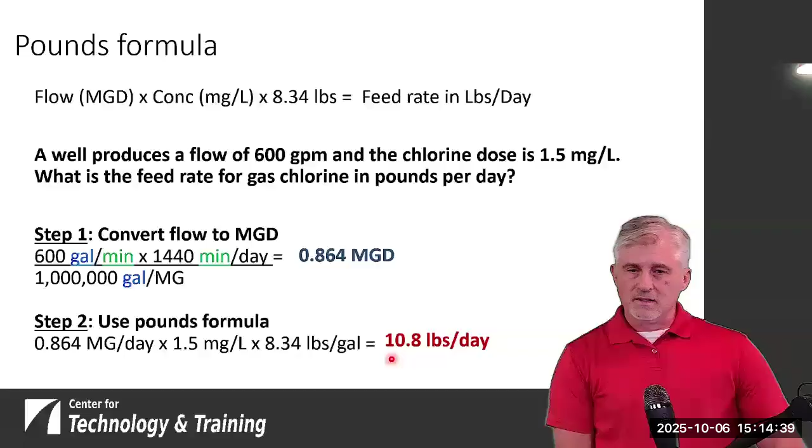Now, to use the pounds formula, we need to take the number of million gallons per day and put it into this pounds formula. So 0.864 million gallons a day times the concentration, the dose that we were given of 1.5 milligrams per liter, multiply that by 8.34 pounds per gallon. When it's all said and done, we're going to end up with 10.8 pounds per day.

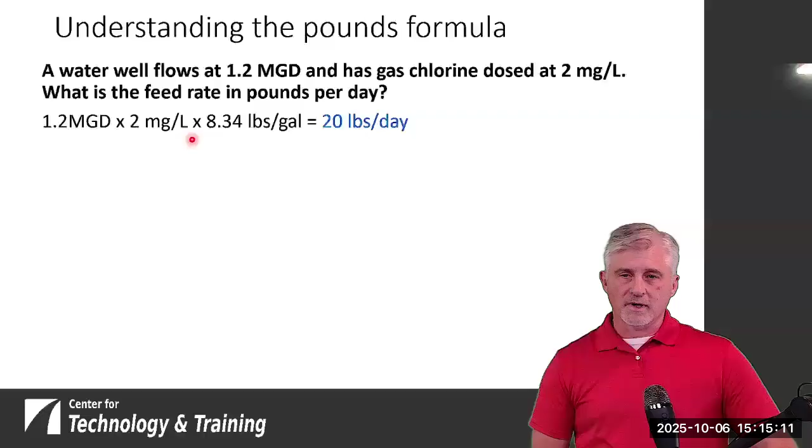So we'll go further on, and we'll look at another example of the pounds formula. A water well flows at 1.2 million gallons a day, and it has gas chlorine dosed at 2 milligrams per liter, or parts per million. What is the feed rate in pounds per day? Okay, so 1.2 million gallons a day times our concentration of 2 milligrams per liter times the weight of water gives us 20 pounds per day.

If we rewrite the formula, we can look at it as 1,200,000 gallons times 2 parts of chlorine divided by the 1 million parts, multiplied by the 8.34 pounds per gallon. How much does it weigh? 10,008,000 pounds. So 1,200,000 gallons of water weighs 10,008,000 pounds. Pretty heavy.

All right, so we take the flow that we had here, the pounds per day now, and we're going to multiply that by 2 parts of chlorine, and divide by the 1 million parts, and that gives us 20 pounds per day. This helps show the concentration in the pounds formula expresses the weight of chemicals as a proportion to the weight of the water.

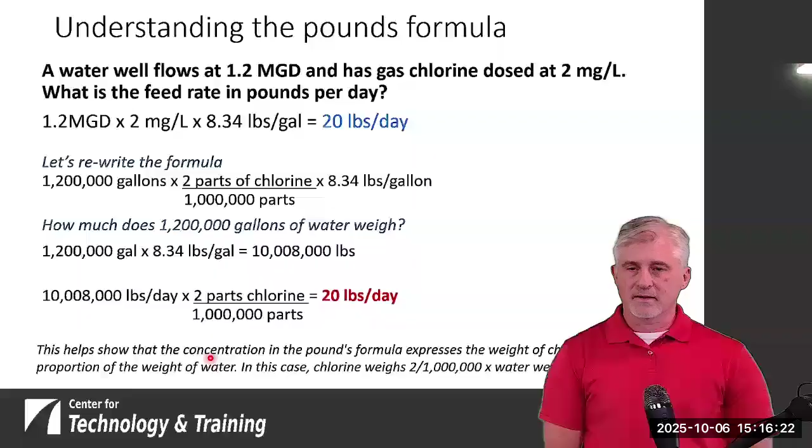All right, so now we have poll number 7. A groundwater well produces a flow of 350 gallons per minute. The chlorine dose is 1.3 milligrams per liter. What is the feed rate of gas chlorine in pounds per day? Lori, please give 5 minutes for this poll. 5-minute timer set.

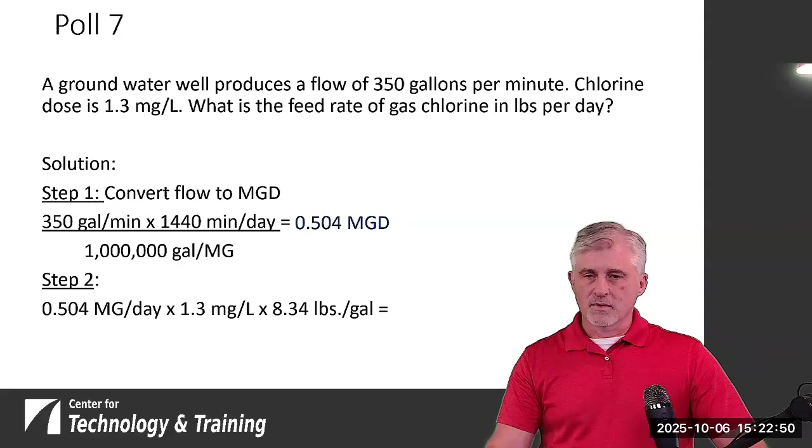Our next step is we take that and we multiply that by the concentration of 1.3 milligrams per liter, our chlorine dose, times the weight of water per gallon of 8.34 pounds per gallon. And it gives us 5.46 pounds per day. All right. Well, great.

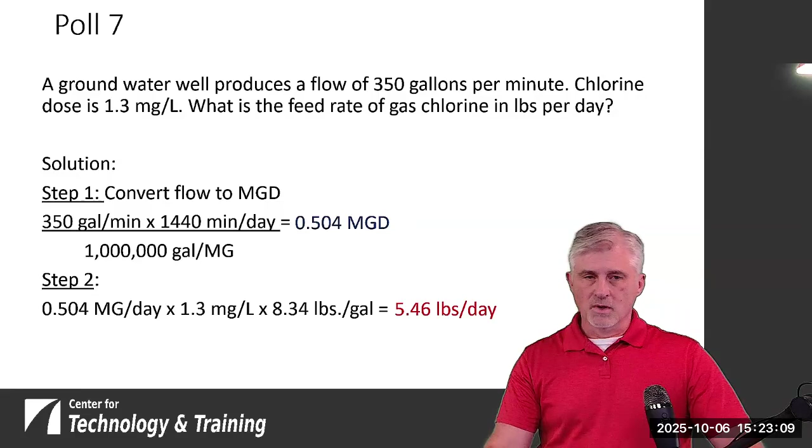So what did we cover today? Greg did an overview of water quality. He discussed some flushing of systems, covered corrosion control, some cross-connection control concepts, and you guys bore with me through the afternoon of some basic math concepts. I appreciate that. So what are our main takeaways from this?

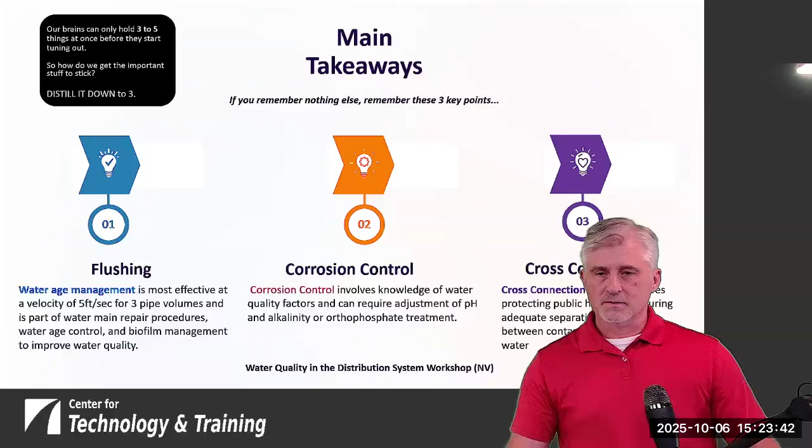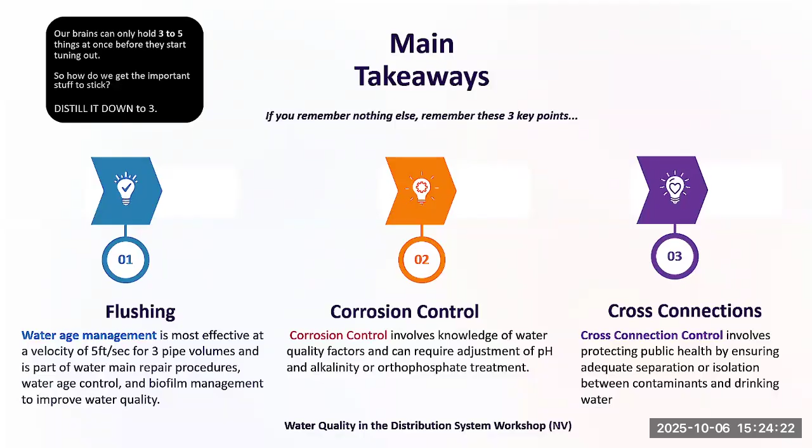We covered several things, but I think the main things we want to look at are flushing. Water age management is important to maintaining water quality. Corrosion control is also important, but we need to make sure that we're not causing things to get into our customers' drinking water through corrosion. And then we need to protect our water system from outside contaminants, and cross connection is one of the more important ways that we can do that.